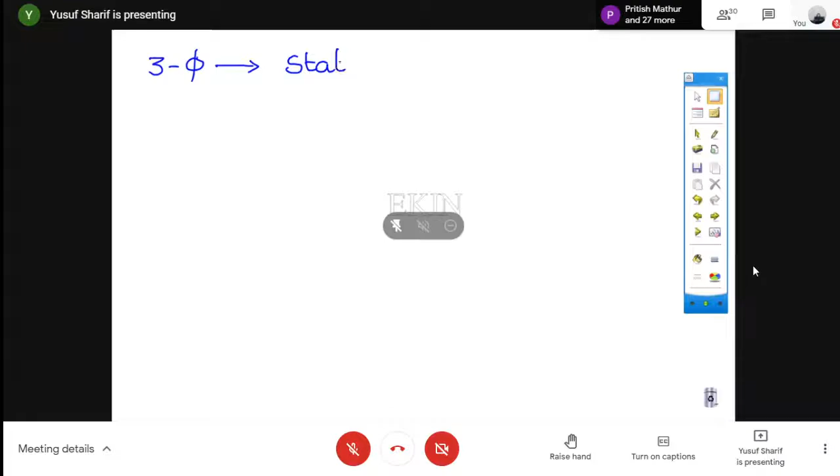So basically we'll be dealing with the AC machine. When we talk about AC machines, we have two kinds of AC supply. One is single phase AC and one is 3-phase. So mostly 80% of our discussion will be confined to 3-phase supply. When a 3-phase supply is given to a stator, because we know that in any rotating machine we have two parts: one is stator and one is rotor.

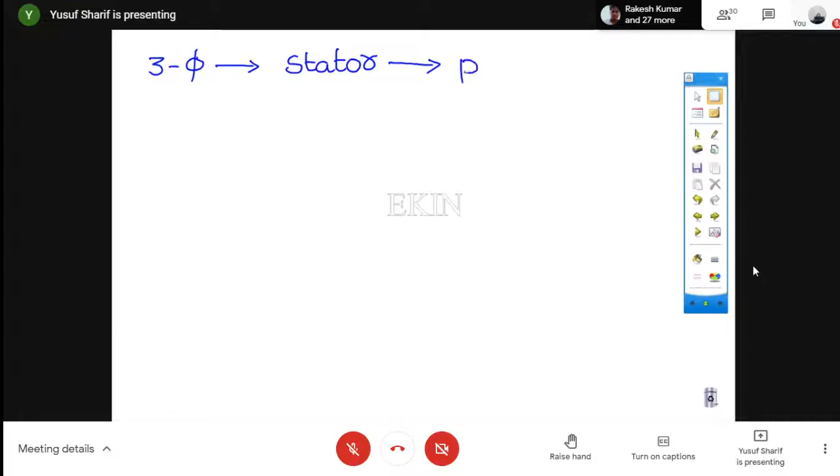So when a 3-phase supply is given to a stator, a magnetic field is produced, and that magnetic field is nothing but your rotating magnetic field. Whenever we give 3-phase supply to the stator, a magnetic field is produced which is revolving in free space, and that is the rotating magnetic field. The speed at which this RMF revolves is called the synchronous speed, and the expression for this is 120 f by p.

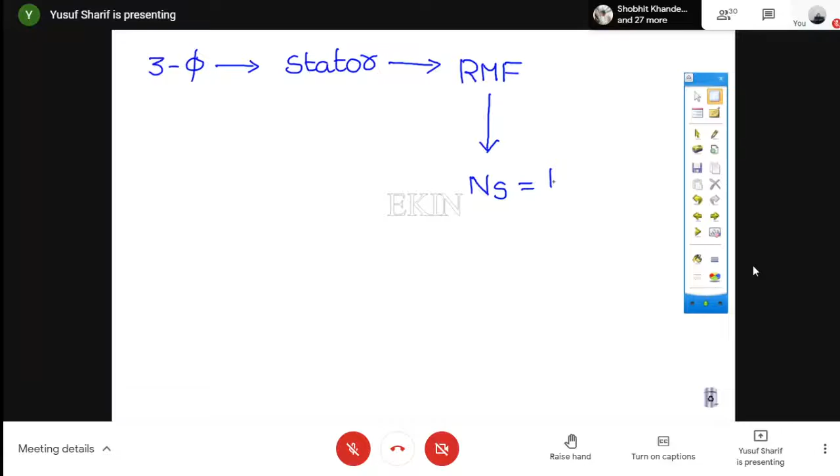120 f by p. So this expression should be on your fingertips as we discuss machines, because this is the expression we'll be using throughout electrical machines: ns is equal to 120 f by p. Is this clear? So this is the outline you should know. We discussed in detail how this RMF is produced, in which direction the resultant is, and how we can say that it is revolving in space. So at least you should know this outline.

Whenever a 3-phase supply is given to a stator, RMF is produced, and the speed of this rotating magnetic field is 120 f by p. Why this RMF is produced and how the winding on the stator is, I have discussed all these in detail. So let me see what you have seen in the last class.

Someone said that you have discussed the generation process. I discussed the generation process. Just tell me, is there any confusion here? Is there any confusion with this slide? No, sir. Okay, fine. So let me erase this here.

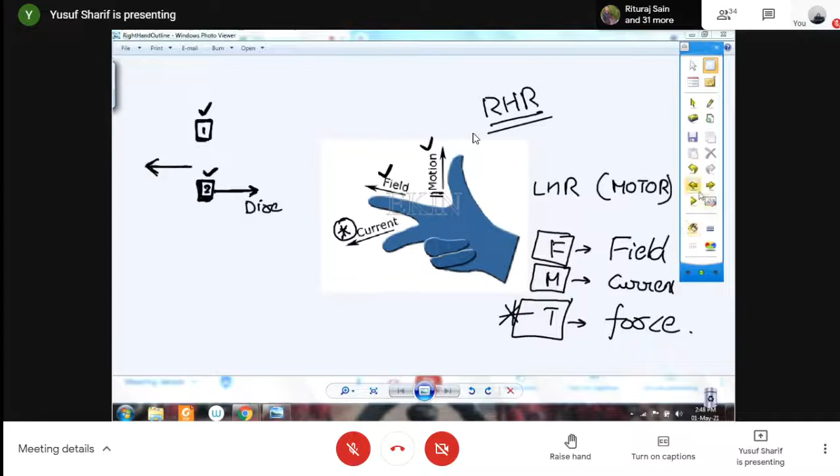Is this clear? So हमेशा याद रखें, if it is a right hand rule or a left hand rule, either a generator or a motor, two parameters should be given, and the third parameter is something that you're going to find out by using the direction in which that particular finger is pointing. ठीक है. तो यहाँ पे what are the two input parameters? Two input parameters are thumb and forefinger. The point to be noted here is thumb gives the direction of motion of the conductor with respect to field. This point is very important.

ठीक है? I'll be giving you an example. Just use this example and try to understand. Okay. So what is that example here? This is vehicle number 1, and this is vehicle number 2. You have two vehicles over here. One vehicle is at rest, and the other vehicle is moving. In which direction it is moving? It is moving in this particular direction.

Just tell me one thing. हम sentence को कैसे पढ़ेंगे यहाँ पे? What is the direction of the motion of the second vehicle with respect to first vehicle? With respect to one, आपका जो second vehicle है किस direction में move कर रहा है? Is it moving in the direction of right or left? First vehicle is at rest and second vehicle is moving. Right or left? Hello. Right. It is moving in the direction of right.

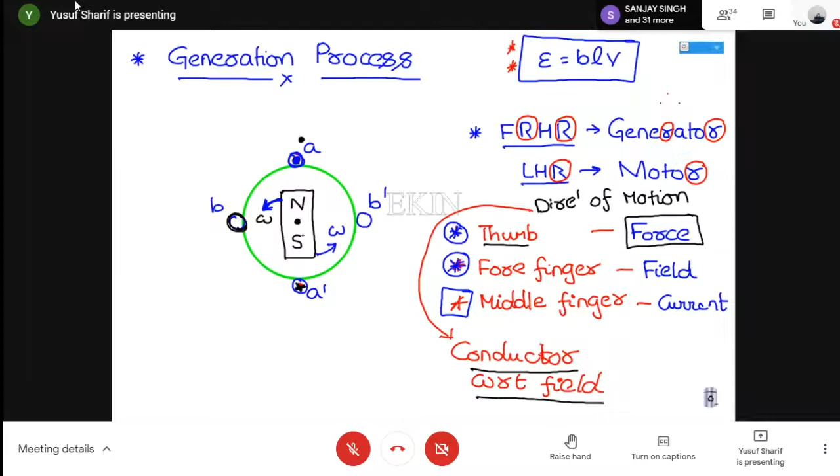So the mistake that we basically commit is, यहाँ पे हम देखते हैं कि this is the direction of motion, तो हम thumb को इस direction में point out कर लेते हैं. But this is the direction of motion in which the field is moving. तो हमारा thumb इस direction में नहीं होना चाहिए. So as I said, two parameters will be input. First of all, my field will be in this particular direction, so मेरा forefinger होगा इस direction में. Just try it along with me. Place your right hand forefinger in this upward direction. Now coming to the other input parameter: the thumb, the direction in which the conductor is moving with respect to field.

Field is direction move कर रहा है. With respect to field, can I say that my conductor is moving in this particular direction? Yes, because my conductor is at rest and my field is moving. With respect to field, मेरा conductor किस direction move कर रहा है? That will be moving in this particular direction. So this is the direction in which I will be placing my thumb. So इस direction मेरा thumb point out होगा.

So just place your fingers accordingly, जैसे मैंने यहाँ पे point out किया. Forefinger in the upward direction, thumb in the right direction. अब मुझे बताइए आपका middle finger कहाँ point out कर रहा होगा? Will it be coming outwards or inwards? Yes, it will be pointing towards you. This is the direction in which the middle finger will be pointing out. So it is out of the plane. Out of the plane means that it should be a dot.

Clear? Hello. Yes, sir. Yes, sir.

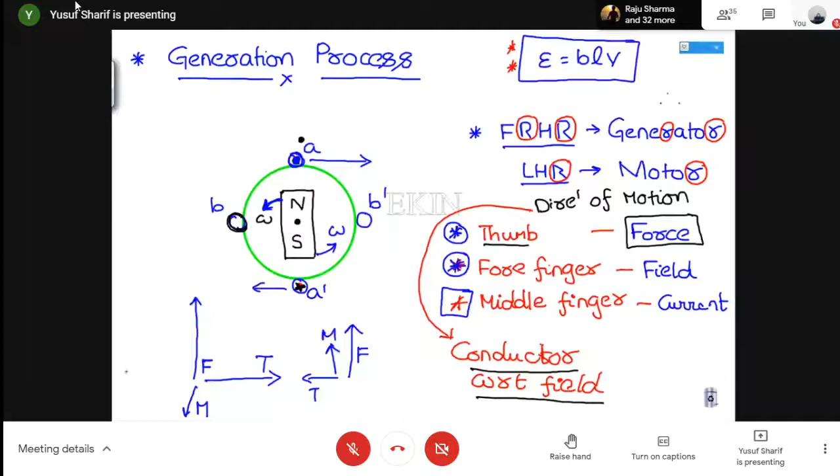When you place your forefinger and thumb in this particular direction, आपका जो middle finger होगा that will be inwards. So this will be a cross. Is this clear? Hello. Is this clear? I hope there is no confusion why it is a dot and a cross. अगर confusion होगा तो भी that might have been cleared by now. ठीक है? Fine.

Okay, so this is what we have seen. So let me do one thing here. Second. Oh, okay.

Okay, fine. See, how many windings we have in this particular structure? Sir, two windings. Yes, we have two windings and four conductors, right? So this is the winding. Winding मतलब इस तरीके से आपका winding होता है, इस तरीके से run कर रहा होगा and it is coming outwards this way. So this is A and this is A dash. So this is one conductor and this is the other conductor. So it is one coil which is having two conductors.

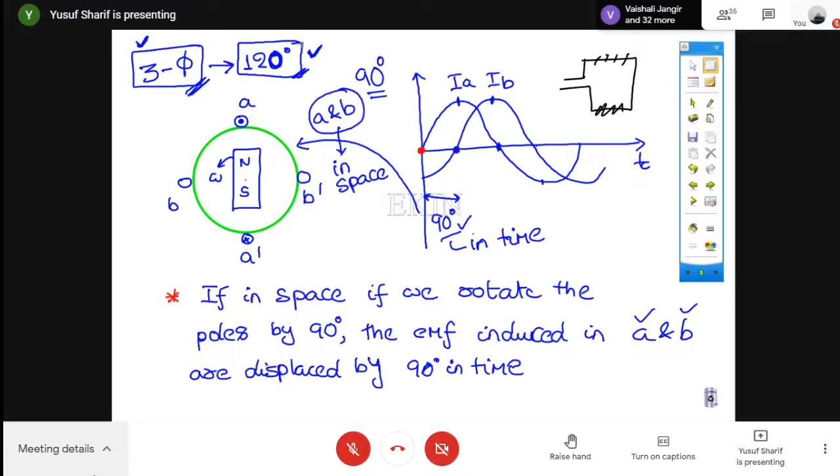And what should be the winding arrangement? As we saw here that there are two windings, A and B, and these two are displaced in space by 90 degrees. So in the same way, what should it be for a three phase output? 60 degree? To get a time displacement of 90 degrees, I placed a winding that is 90 degrees space displaced. So in the same way, to get a 120 degree time displaced waveform, how should my winding be?

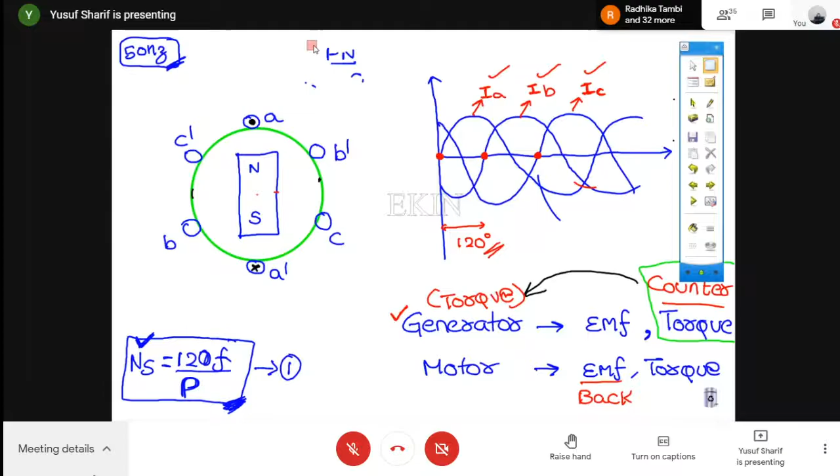Fine. So these are the three windings that I have. This is the winding number 1. This is your first winding, here is your first winding, okay. So this is the winding number 1.

And where is the second winding? This is the second winding. This is the second winding, this is its second winding.

And where is the third winding? This is the third winding that I have. This is the third winding that I have.

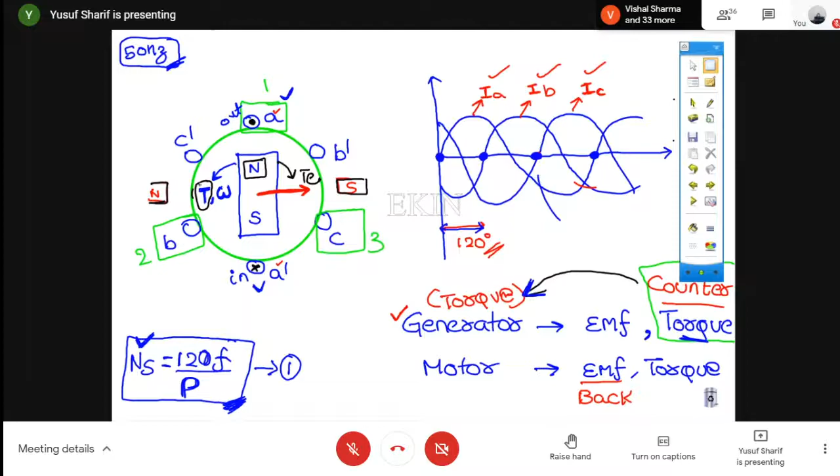So what is the basic definition of electromagnetic torque according to you? So when the rotor flux and stator flux interact with each other, the electromagnetic torque is produced. Okay, fine, very good.

The answer was perfect. See, whenever you have two magnetic fields - which magnetic field? This north and south pole is one magnetic field, and the other magnetic field is due to the current flowing in these conductors, because of which a magnetic field is induced. So whenever you have two magnetic fields interacting with each other - these are the two magnetic fields interacting - this will result in a torque, and this kind of torque is called the electromagnetic torque.

In the very first class, if you remember, I told you there are two kinds of torque: one is electromagnetic torque and one is reluctance torque. I think now you understand what electromagnetic torque is, because at that time I told you that two magnetic fields will interact and a torque will be produced. That torque is nothing but electromagnetic torque, and now you can visualize it clearly here. Two magnetic fields interacting, a torque is produced in the opposite direction, which is called the counter torque, and this is nothing but your electromagnetic torque here. Clear? Yes, okay fine.

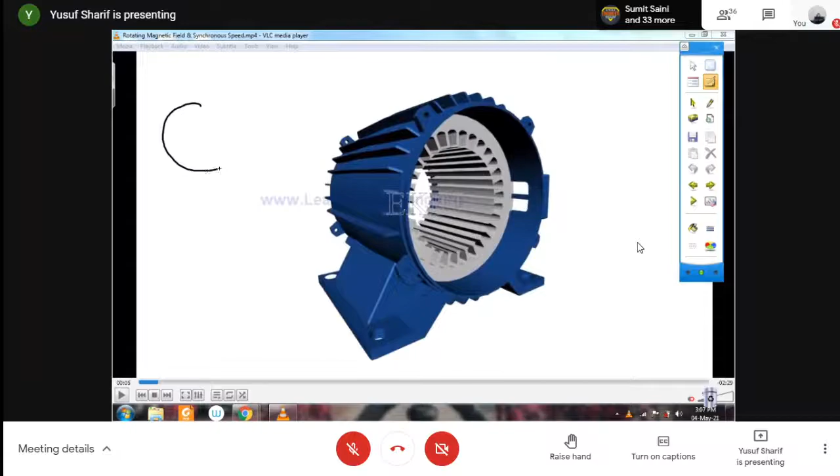Okay fine, so let me take it on the screen here. जब भी मैं आपको ऐसा ड्रॉ करता हूँ, whenever I draw this way and I say कि this is first winding, this is the second winding, this is third winding, this is A, B, and C, this is C dash, this is B dash, and this is A dash. So this is what I show you, right?

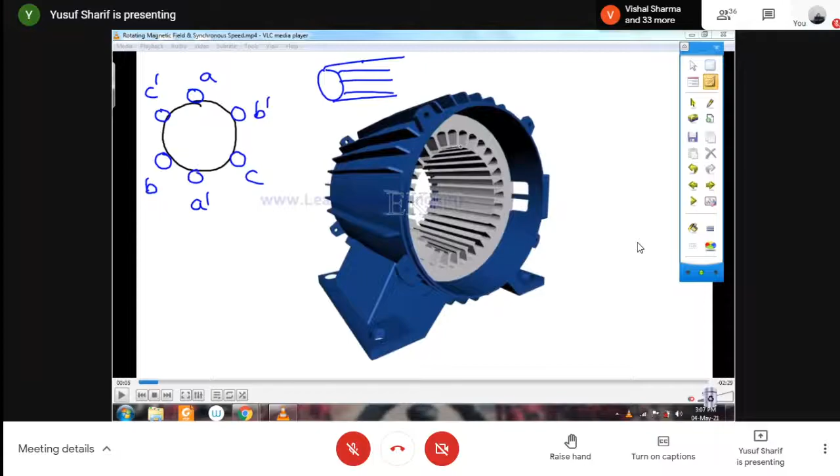Hello, yes sir. So these are the slots in which your winding is mounted.

So actually, how does this look? Let me take some other color. So this is how it actually looks like, इस तरीके से होता है ये।

Okay, so we take a simplest structure to explain you. We take a simple 3 windings to explain you. So this is how the slots are, जिसके अंदर आपके पास winding होते हैं। And this is nothing but a cross sectional view.

Cross sectional view का मतलब क्या है? अगर इस मोटर को मैं आगे से देखूंगा, if I would simply call it as a front view, अगर फ्रंट व्यू से हम देखेंगे तो this is how it will look like, इसी तरीके से आपको दिखेगा। I cannot draw a 3D picture on the paper, so that is how we draw a cross sectional figure.

So actually होता क्या है? इस तरीके से होता है आपका स्टेटर, जिसके अंदर स्लॉट्स होते हैं, जिसके अंदर आपके वाइंडिंग्स रन कर रहे होते हैं। Is this picture clear? So let me show you one thing.

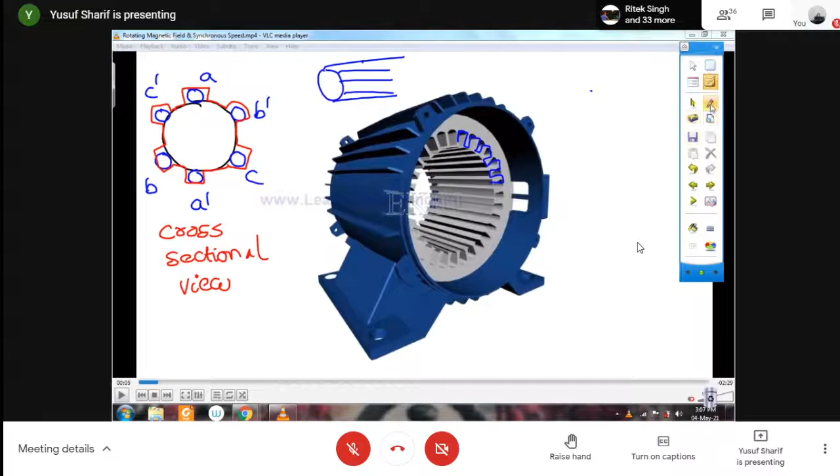मान लो इस स्लॉट के अंदर एक वाइंडिंग है, ठीक है? तो मान लो कि ये यहाँ से जाके इस स्लॉट से बाहर आ रहा है। So what is that I name this? I name this as A and I name this as A dash। समझ में आ रहा है किस तरीके से होता है ये?

Hello, yes sir. So this is nothing but A dash. So just try to visualize a bit, I know थोड़ा सा difficult होता है initially machine में। So please try to visualize this. I hope now you are getting bit of an idea, चलो okay fine, ठीक है।

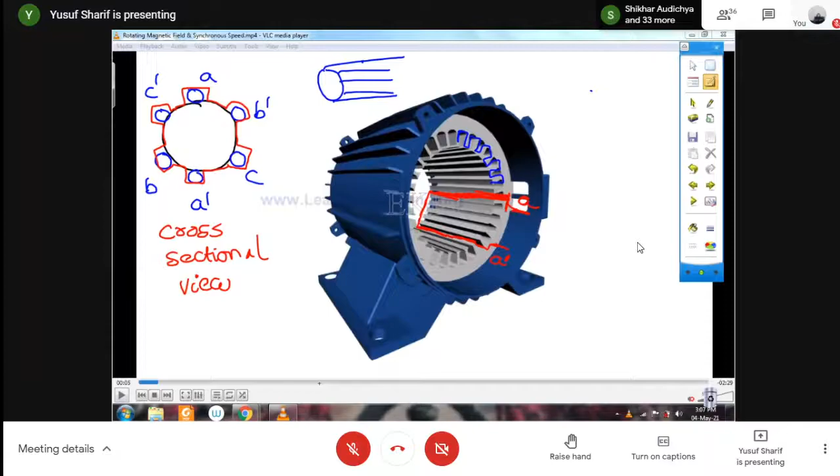So let me play this continuous video. So this is how the winding is, यहाँ पे आपको दिख रहा होगा इस तरीके से आपकी वाइंडिंग होती है। इतने वाइंडिंग्स हम ड्रॉ नहीं करते, because it becomes difficult and it becomes difficult due to explain also। Simply we take 3 windings, ठीक है, जैसे जैसे वाइंडिंग्स बढ़ते जाएंगे वैसे वैसे नंबर ऑफ पोल्स बढ़ते जाएंगे।

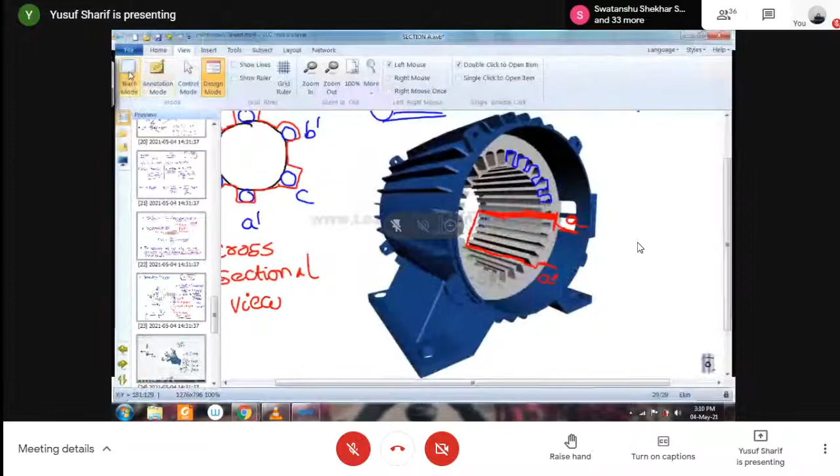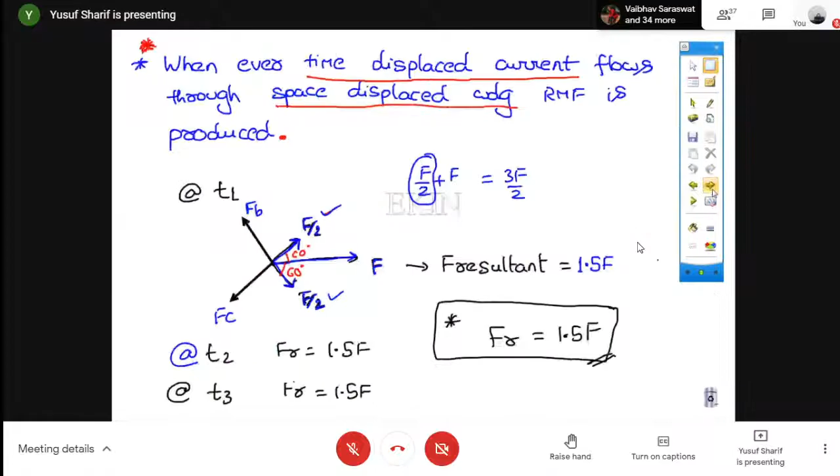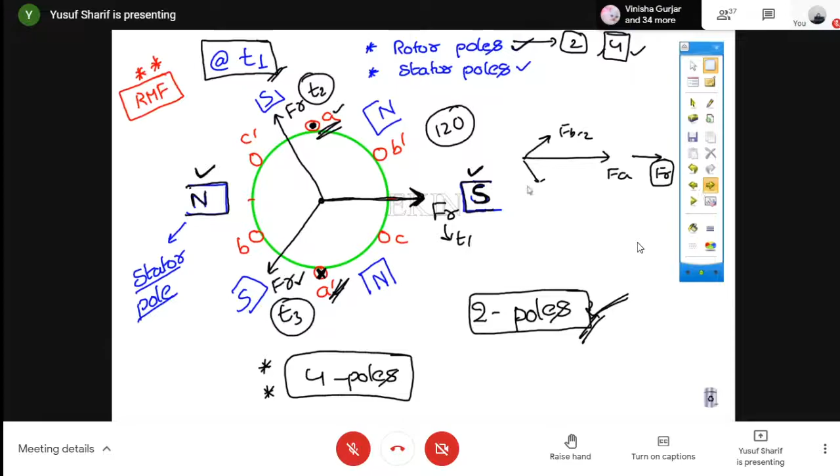यस, यहाँ पे देखिए, so you have 3 windings, 3 windings आपके पास सिर्फ 2 ही poles थे यहाँ पे। किसी भी instant में आपके पास 2 poles थे, बाकी poles को मत देखिए because वो different instants में draw किए। So at an instant you have only 2 poles and you have only 3 windings। तो यहाँ पे आप देखिए it is a 4 pole structure। 4 pole structure के पास कितनी windings हैं आपके पास? 6 windings हैं। 6 windings मतलब कितने conductors हो जाते हैं आपके पास? 12 conductors हो जाते हैं, you have 12 conductors over here and you have the 4 poles which are revolving। समझ में आ रहा है?

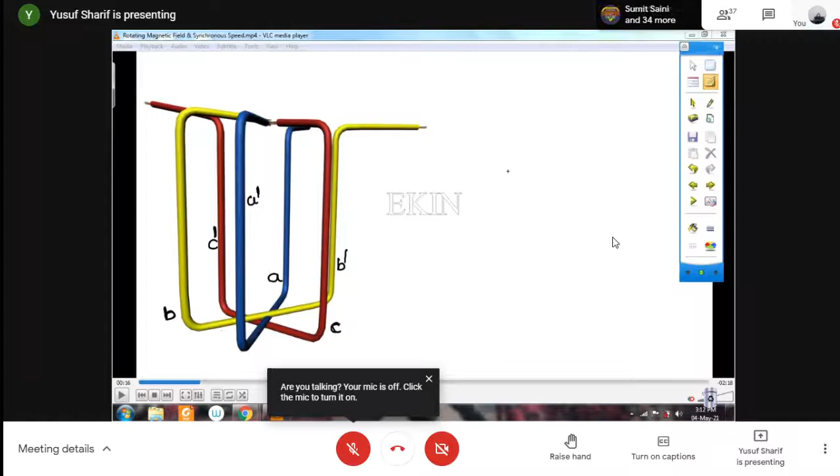Is this clear? So I hope you can see the space displacement over here. इन दोनों के बीच में space displacement कितना है? 120 डिग्री का space displacement है। Similarly, between this yellow and red, yellow और red के बीच में कितना space displacement है? 120 डिग्री का space displacement. Similarly, between this, again it is 120 डिग्री space displacement. So these are the 3 windings. इस तरीके से आपके 3 windings आपके स्टेटर पे माउंट किए होते हैं फॉर 2 पोल स्ट्रक्चर। क्लियर?

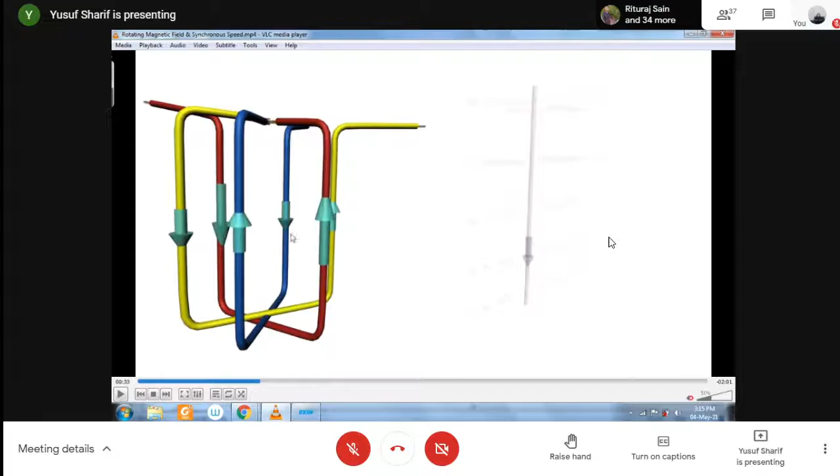So as it is a two pole structure, so how many poles will be developed? You'll be having only two poles that are getting developed. ठीक है, so थ्री फेज सप्लाई दे रहे हो, so this is a supply that we are giving। ये जो आप देख रहे हो ये सप्लाई हम दे रहे हैं, किसके? वाइंडिंग पे दे रहे हैं। So whenever you are giving this kind of supply, you can see that आपका जो resultant poles है they are moving in space or not? This is the instant one। देखें जैसे जैसे सप्लाई आपका चेंज होते जा रहा है, what is happening? Poles are rotating or not?

Hello, yes, sir. Yes, sir.

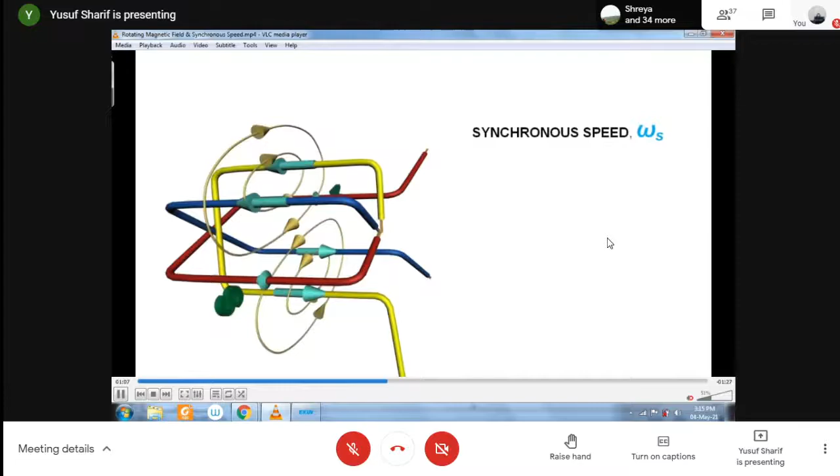Yes, you can see, right? So this is nothing but the rotating magnetic field। इस तरीके से आपका rotating magnetic field होता है। So let me show you this once again।

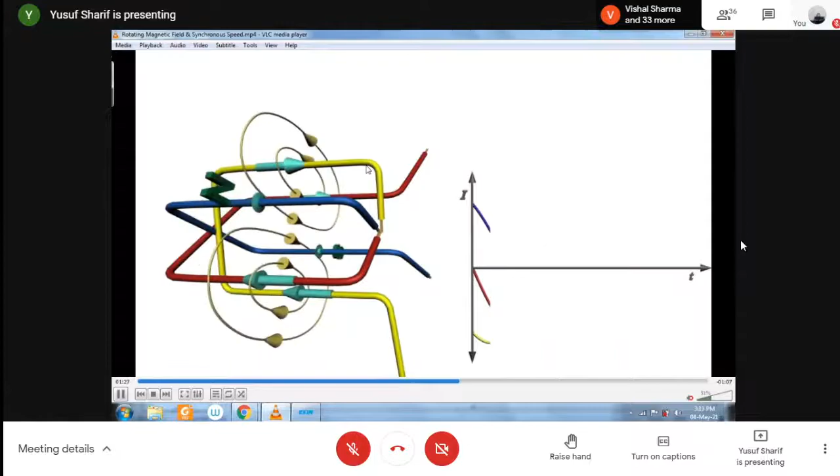Fine, he has given the speed over here, it is 2 pi f. This 2 pi f is given in radians, you know.

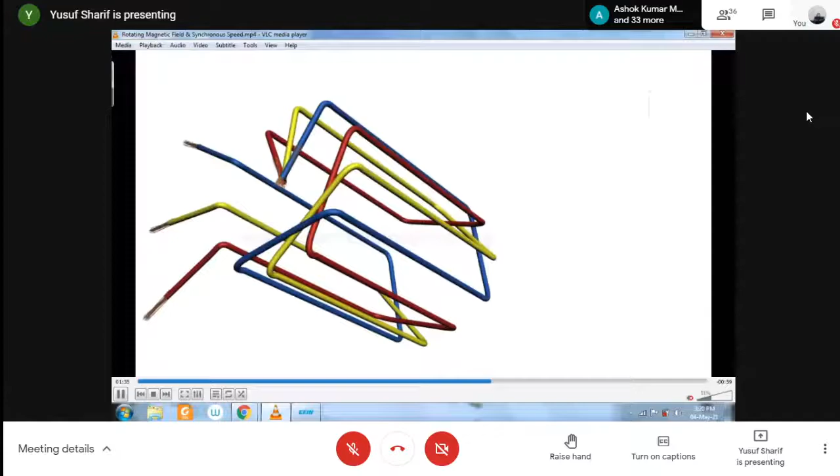So it should be a 4 poles. So this is what we are going to visualize. It is a 4 pole winding. So how many poles we have here? दिख रहे हैं आपको N1, N2, S1 and S2.

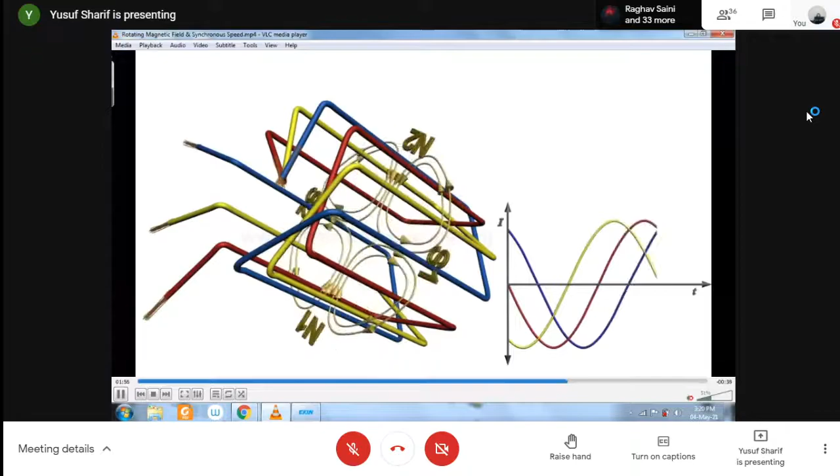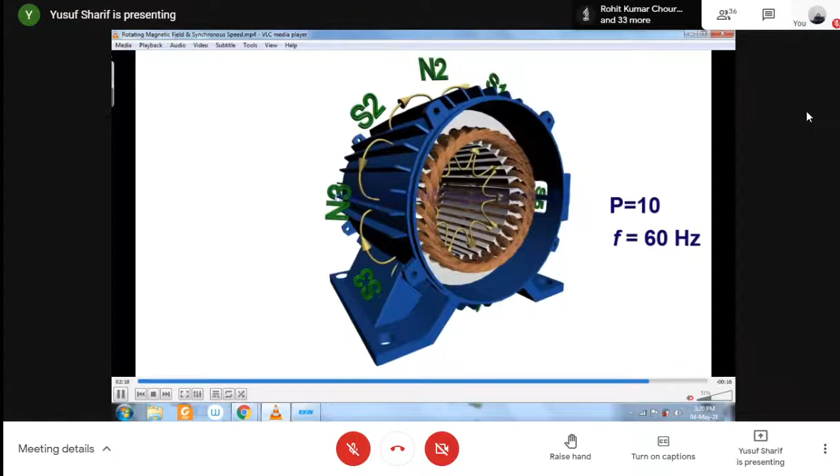He has taken a 10 pole structure over here. 10 pole structure, and what is the frequency here? The frequency here is 60 hertz. So let me tell you what is basically asking here.

तो यहाँ पे इनके पास एक 10 pole structure है, and frequency is 60 hertz. Nothing but he has given a 3-phase supply whose frequency is 60 hertz and the number of poles is 10.

So now the question is, what is the speed of the rotating magnetic field? At what speed will this rotating magnetic field be rotating? That is the question. So what we know is this magnetic field will be rotating at a speed of synchronous speed, right?

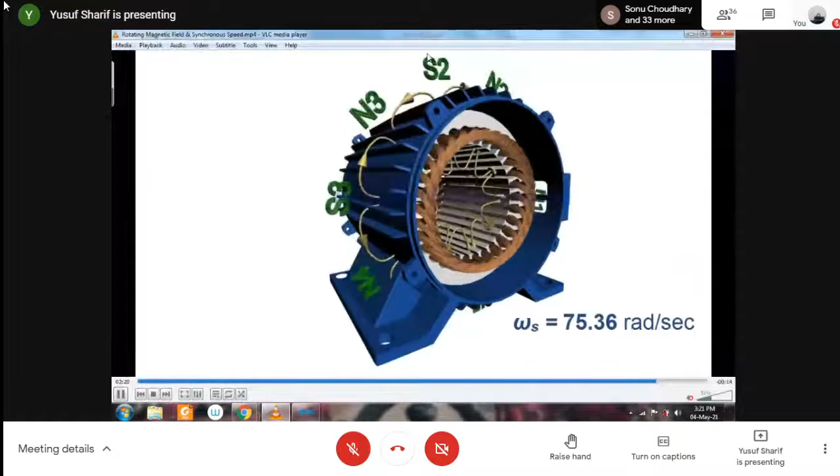So how do you get this expression? इसका value कितना होगा बताइए एक बार. For a 10 pole, frequency 60 hertz, what would be the speed of this rotating magnetic field? Speed of rotating magnetic field मतलब, see here, this magnetic field is rotating, right? So at what speed is this rotating magnetic field revolving in the free space? That is the question. कैसे आएगा उसका result?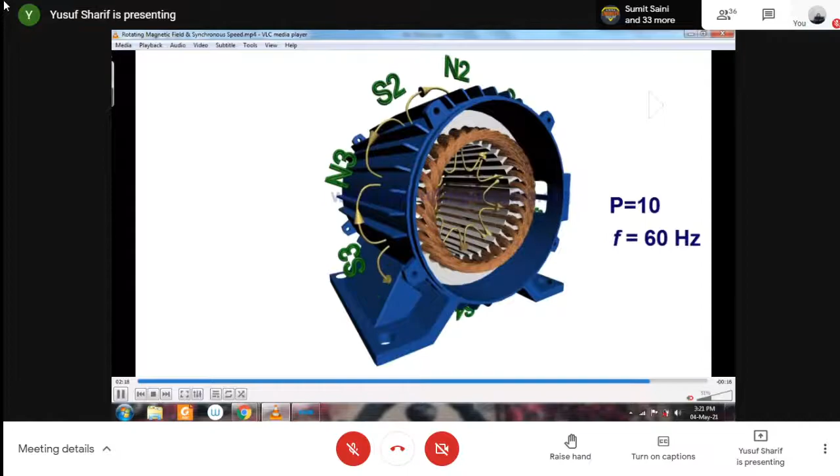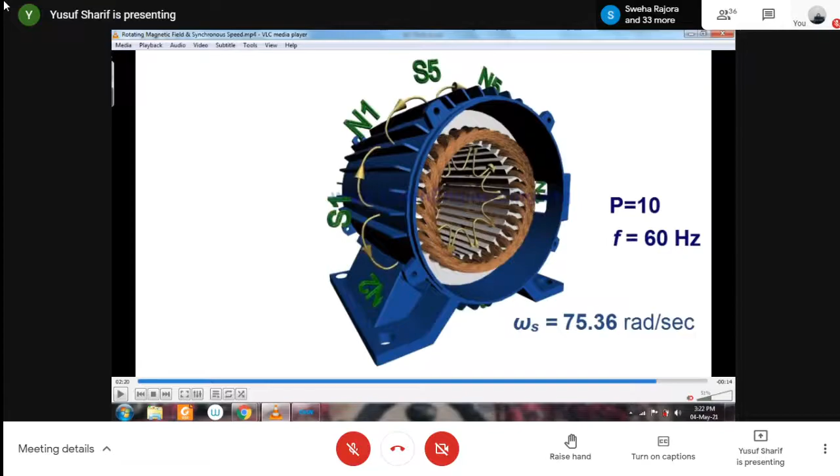I hope he has given the answer also here. And that is in radians, but we want in RPM. देखिए यहाँ पे he has given it as 75.36 radians per second. We'll be calculating in RPM. So basically, how do you get this synchronous speed? कैसे calculate करेंगे आप? सर 120 F by P से. Yes, very good. The answer is 120 F by P.

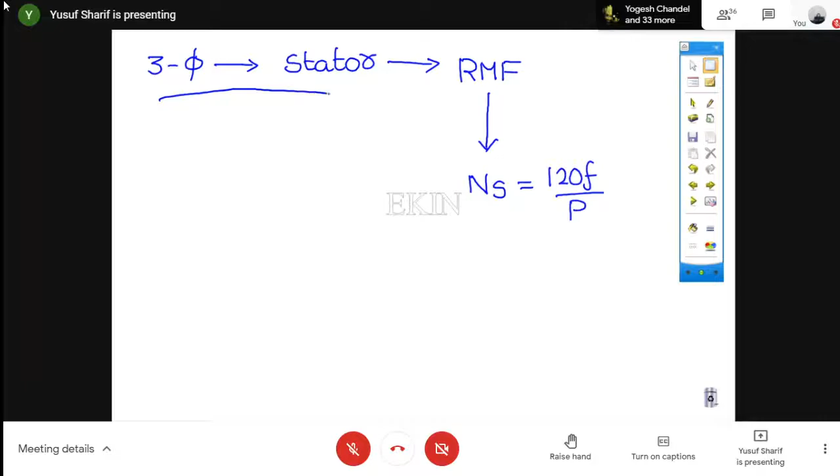Oh, one second. Okay. Well, the answer is 120 F upon P. So this is nothing but the synchronous speed. I told you that अगर आपको कुछ भी समझ में नहीं आया, at least you should know this outline of this entire 5 classes. That 3-phase supply is given to a stator, जिसकी वजह से RMF produce होगा, and the speed of this rotating magnet will be 120 F by P. If you know this, the answer is in front of you. It is revolving at synchronous speed. That is 120 F by P.

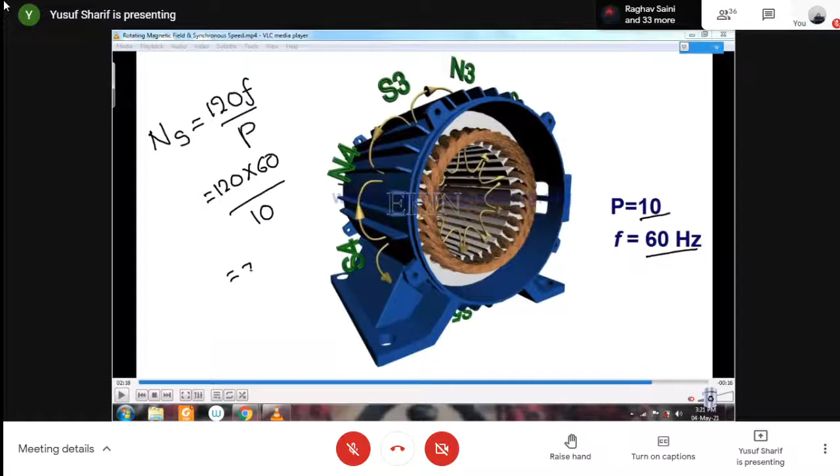120. What is frequency? Frequency is 60. So 120 into 60 divided by 10. What is the answer that you get? 720 RPM. Is this clear? I hope you could visualize this rotating magnetic field and all.

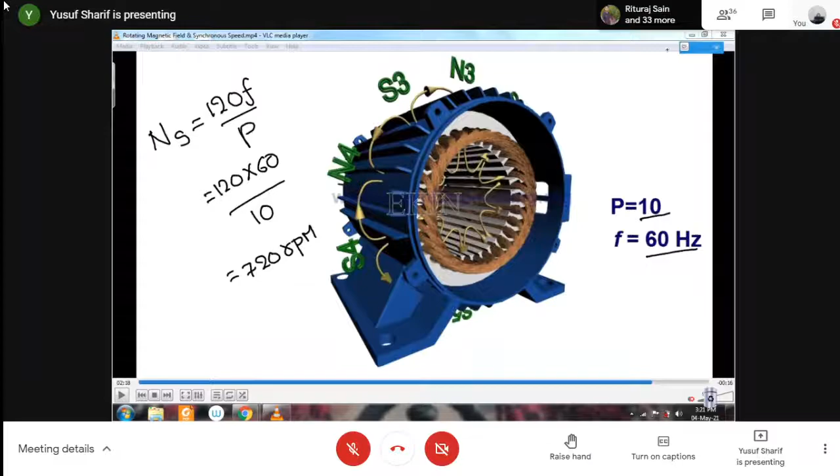Yes, sir. Okay. See, this is a video that I downloaded from YouTube. In case if you want to get a better idea, there are many videos available on YouTube, ठीक है? आप जाके देख सकते हो and you can learn from that. See, if you want to learn, online resources are numerous. Instead of watching some crap on YouTube, just take 10 or 15 minutes and try to learn these kind of things. What is this rotating magnetic field and all?

Because this is something that should be shown practically जब lab में attend करते हो. Obviously, you cannot visualize this rotating magnetic field because field को आप कभी visualize नहीं कर सकते, right? But अगर animated version आप कुछ देख लोगे, you will have some clear picture of what you are actually studying. Because with 3-phase supply your rotor will start rotating, but you will not see the actual phenomena behind why the rotor is rotating. So this is the entire thing that you should know.

And let me tell you one thing, rotating magnetic field is an important concept to understand any AC machine, either it be your induction or synchronous. To understand any AC machine, this concept of rotating magnetic field is very, very important.

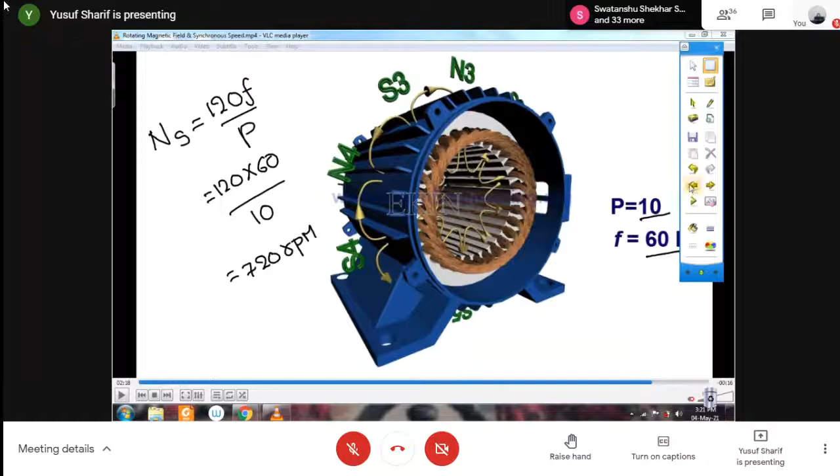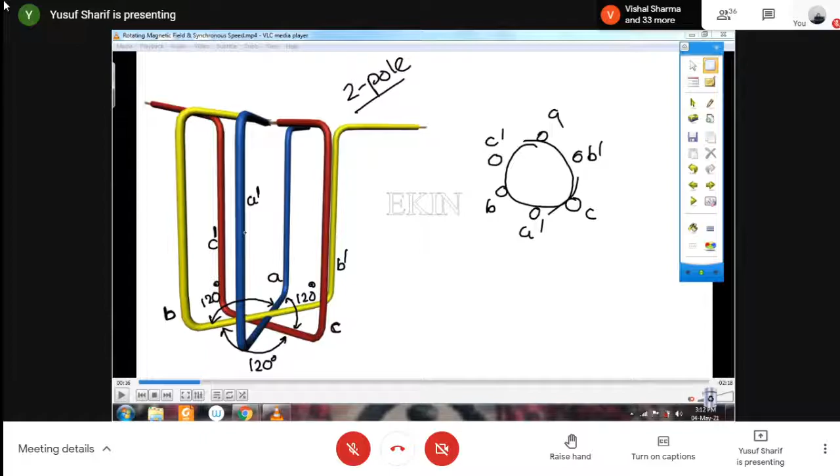See, the reason for me showing you this is I thought कि जब induction के बारे में discuss करेंगे at that time I will be showing you this entire thing. I was just imagining that you people are understanding, but I hope अभी आपको थोड़ा बहुत आइडिया आ गया होगा कि अभी तक हम क्या डिस्कस कर रहे थे, what is this cross sectional view and what is the actual view of this machine. Clear? Yes. Okay, fine.

See, very few students are responding to this class, not only this class, most of my classes. So please थोड़ा सा ध्यान रखें. See, I'm telling you one thing honestly. अगर आप ये चीजें पढ़ने के लिए बैठोगे, if you... one second, please don't leave the class. Taking the attendance. Sumit Saini.

See, for me to understand all these things, it took a lot of time to get some clarity over this concept and all. So, जो भी मुझे आता है, I'm trying to teach you people. Okay? And no doubt, even if I'm not teaching you, you can understand it by yourself and आप खुद पढ़ सकते हो. But it is a